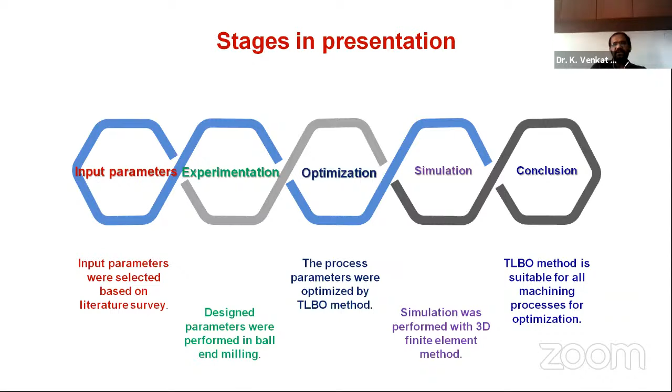Next is optimization of process parameters to minimize power consumption using the TLBO method - how it was selected, we are going to see now. Next is simulation, using many simulation softwares like ANSYS, DEFORM 2D, 3D, AdvantEdge, etc. Finally, we go to the conclusion.

Now if we see the ball end mill cutter, I've shown you the shape of it. It's mainly used to meet demand in production of micro-feature-based miniaturized parts like biomedical devices, parts used in automotive industries, aerospace industry, and dies for forging and casting. These ball end mill cutters have the additional advantage that complex shapes with good surface quality can be made.

But there are some fundamental challenges with the ball end mill cutter with respect to surface roughness, tool life, cutting forces, and overall efficiency, which includes power consumption. In high speed ball milling, cutting force is one of the important machining characteristics that has great influence on other characteristics like tool vibration. Tool vibration results in tool failure and surface roughness issues. Finally, cutting forces have major significance on power consumption.

So the aim of this study - this work, the presentation I am presenting here, was already published in a measurement journal by me in 2019. The focus was on power consumption.

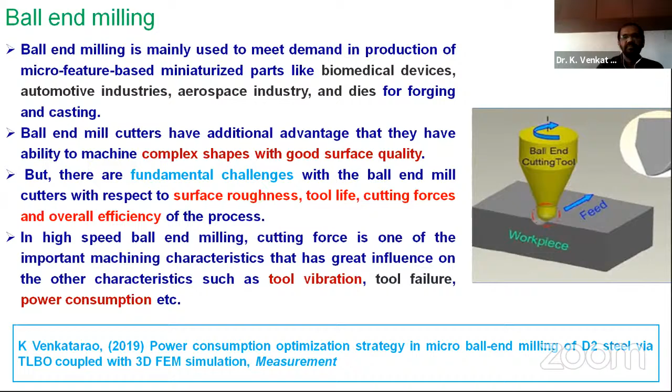Next, what are the different optimization techniques used in manufacturing as well as mechanical engineering? Taguchi method, response surface methodology, gray relation analysis, particle swarm optimization, genetic algorithm, simulated annealing, ant colony algorithm. In addition to these 7, we commonly use other methods - graph theory and matrix approach, along with utility concept, and finally the teaching learning based optimization technique.

Now if we see the first one, the Taguchi method - it is a single response optimization technique. A simple example: there is one turning process. In the turning process, we have 3 input parameters - cutting speed, feed, and depth of cut.

The responses, the machining characteristics or output characteristics, let us assume are surface roughness and cutting force. We want to reduce both surface roughness and cutting force. In the Taguchi method, you cannot optimize the process parameters combined for these two - that is called multi-response optimization, and it is not possible. So we can optimize the process parameters for surface roughness and for cutting force separately and individually.

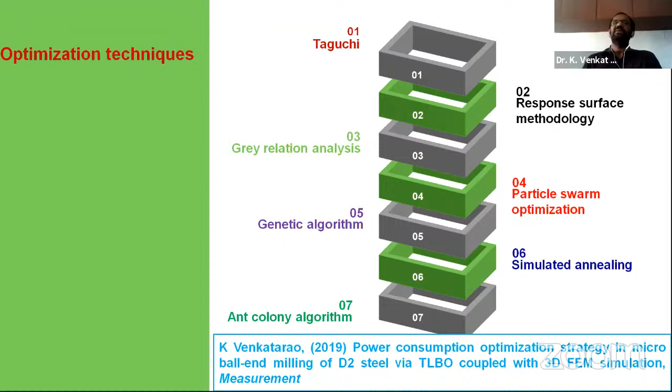From the optimization techniques, as per our requirement we selected TLBO, which I will explain. Next, for simulation, we selected FEM-based simulation. For this, we used Third Wave AdvantEdge, an advantageous software for machining simulation, which is easy to use. That's why I selected these.

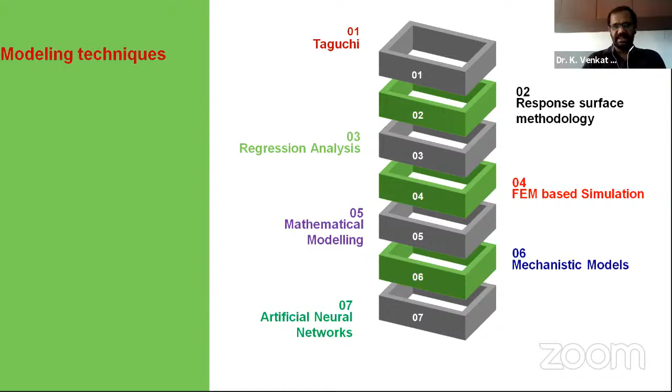Now this is Teaching Learning Based Optimization. In some applications, this TLBO method is able to handle complexities in optimization. This I already explained. So how does TLBO work? First, knowledge is transferred from teachers to students - that is called the teacher phase. After that, knowledge is transferred from good students to poor students - that is called the learner phase or student phase. This way optimization takes place.

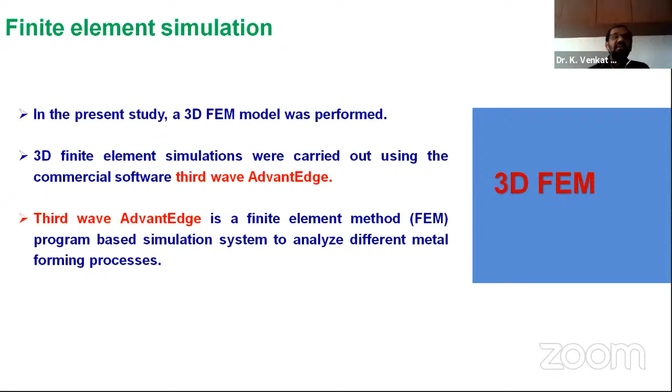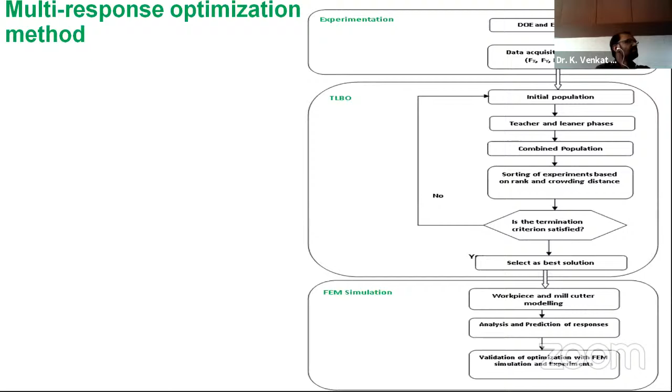Next is TLBO - initial population is defined. After that we have teacher and learner phases. Next is combined population, from which we select the best one. Finally we have the simulation. Using that simulation, the output characteristics are estimated and the optimization is validated.

But the problem is that in a CNC machine there are many subsystems, not only the machining process. Generally during machining, cutting forces are developed and some power is consumed for that. Also, if you see the table moving in X and Y directions, that additionally consumes power not directly related to machining. You can include that power because while machining we are moving the table, so we include the power consumption for table movement in the cutting process.

But if you see the coolant supply, some power consumption is required to supply the coolant. To change tools, some power is consumed. To operate the controls, some system is required that consumes power. Other than machining, there are other subsystems like coolant supply, control systems, and tool change - all of these also consume power. These three power consumption areas also get included if you measure power directly. So I don't want to include those elements. That is why I estimated the power consumption using the cutting forces instead.

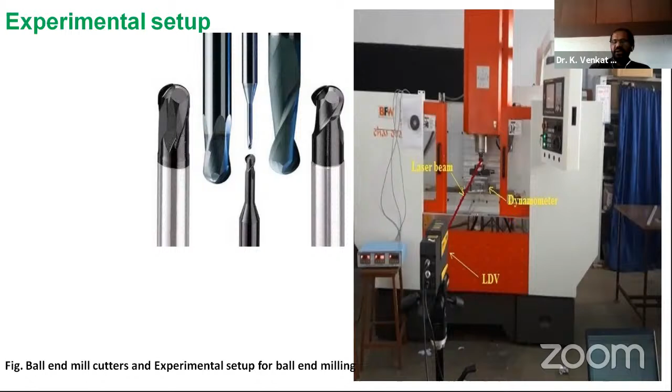Cost of that one is around 18.5 lakhs, which was purchased under the DST project, imported from Germany. So where you have the dynamometer, using the dynamometer forces are measured in X and Y direction. Next, let us see the experimental procedure followed in that process.

Experiments are conducted using the mill cutter, which is a 2-fluted carbide ball end mill cutter. Each experiment started with a new mill cutter. The LDV, which is a Polytec PDV-100 type laser Doppler vibrometer, is used to measure amplitude of tool vibration during the machining process. Next is the Kistler 9257B type dynamometer used to measure the cutting forces during the machining process.

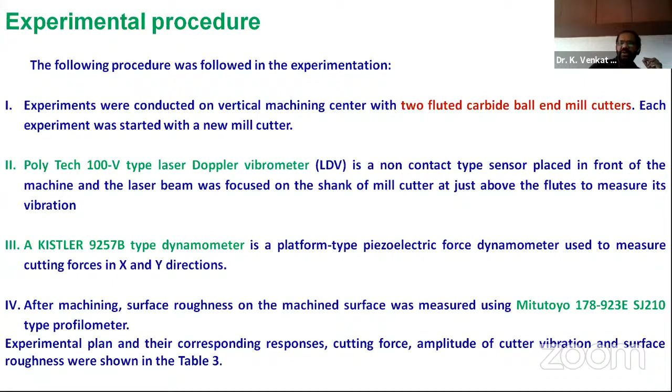After machining, the tool and the workpiece were removed. Then the surface roughness on the machined surface was measured using the Mitutoyo 178-923E SJ210 type profilometer. After that, all the experimental results which are collected and estimated are placed in the table. FX, FY,

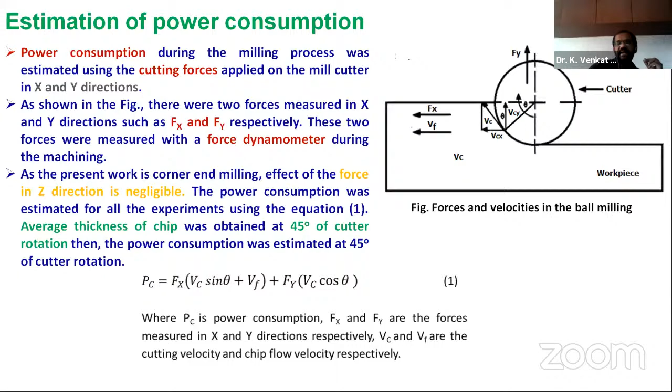Using this equation 1 at 45 degrees of cutter rotation, where you have the average thickness of the chip, that's why we estimated the power consumption, these values were taken here. Now we are going to the optimization process.

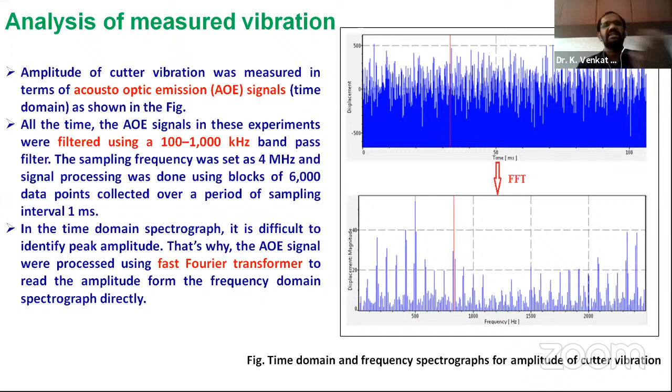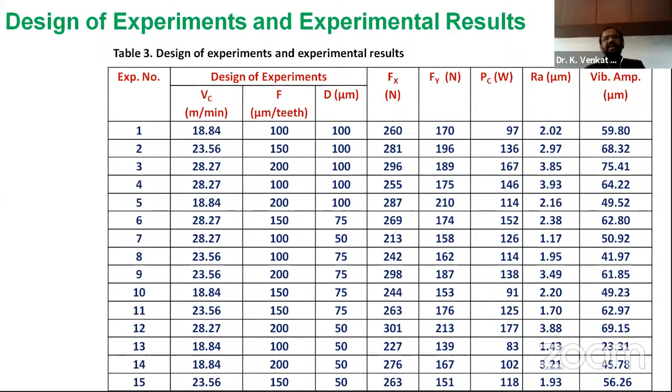These constraints, Y and RA - Y is nothing but amplitude of cutter vibration, RA is surface roughness - should not exceed those particular values as per ISO standards. So how were these equations obtained? This table, table 3, this data you simply place in Minitab 17, 16, 18, 19, whatever the version. You put this table there, you select the inputs and outputs, and if you generate, you will get these equations in terms of the inputs.

For PC, RA, Y, we got the mathematical equations in terms of VC (cutting speed), feed, and depth of cut. Finally, we put the constraints on Y and RA. During optimization, the cutting speed should not cross 15, should be within the limits 15 and 30. It should not be less than 15, should not be more than 30. Similarly, feed should not be less than 100 micrometers per tooth and should not be more than 300 micrometers per tooth. Depth of cut also should not be less than 15 micrometers and should not be more than 200 micrometers. These are the constraints. What are these parameter bounds?

When we allow interaction between the students, knowledge is transferred from one student to another. The general condition is that the intelligent student, the fast learner, cannot concentrate for 24 hours of time. He will set some time. So for this particular student, to whom I am the mentor, I have to give minimum 2 hours or minimum 1 hour of coaching, and it should not cross 3 hours. So I can spend between 1 to 3 hours on him. The mentor, that fast learner, cannot spend more than 3 hours, and at the same time the coaching should not be less than 1 hour. Like that, the parameter bounds were set.

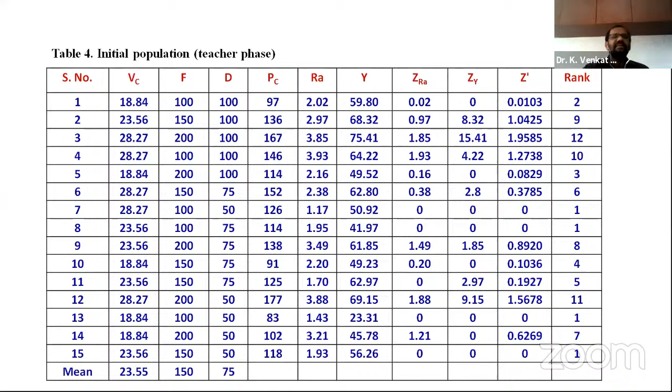That one method he introduced here: we have to identify and calculate the difference underscore mean for the cutting speed, feed, and depth of cut. For the 3 inputs, you have to estimate the difference underscore mean. The formula is there, you don't need to worry about that, all the formulas are available: R into X minus X bar.

What is R? R is the random number. You can select any value between 0 to 1. So in this study we selected random numbers: 0.89 for the cutting speed, 0.75 for the feed, 0.41 for the depth of cut. Like that, these random numbers were selected for the 3 inputs. So R is the random number, X is the input value as we know, and X bar, already I told you, is the mean value.

How to estimate difference_mean? I will explain with an example. See this one, difference_mean for the cutting speed, 0.89 we already selected here. You can take any value, even in reverse order like 0.41, it doesn't matter. Whatever value you wish, you take that. So here I have taken 0.89 into X minus X bar.

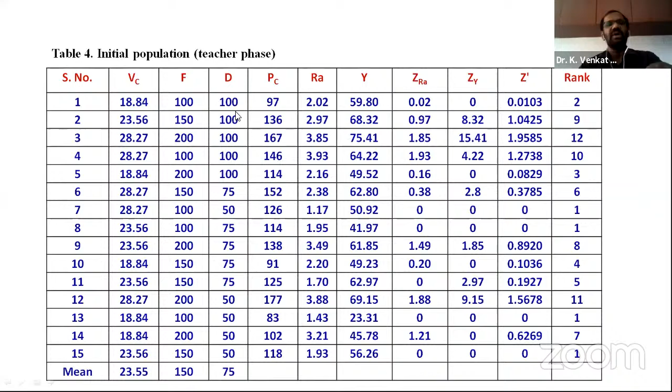18.84 plus minus 4.19, you will get 14.65. Where did you get this 18.84? See this one, here we have the difference_mean. Similarly for the hundreds also, difference_mean values were added. So if you add this for VC, that is cutting speed, you have 14.65.

New feed, you got 62. New depth of cut, you have 110.25. So far it is good. A small thing I will tell you: cutting speed is 14.65.

Now for the feed, if we see 100 plus minus 37.5, you will get 62. It is less than the parameter bound. That is why we have to take 100 here, and that we have taken.

Now if you see here D1, if we add the difference_mean to the 100, we get 110.25. If you see here, that is within the range. That is why it is not required to change the values which were taken.

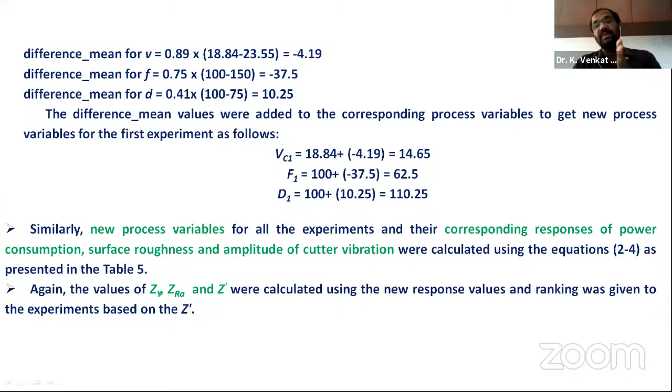So these two values are not the same, 15 and 100 are not the same. Actual values are 14 and 62.5. As they crossed the minimum limits, as per our requirement minimum values we should not take, we should take the minimum values, not less than that. That's why we have taken 15 and 100, and put A at the bottom. The values have crossed the limit, hence the bound values were taken.

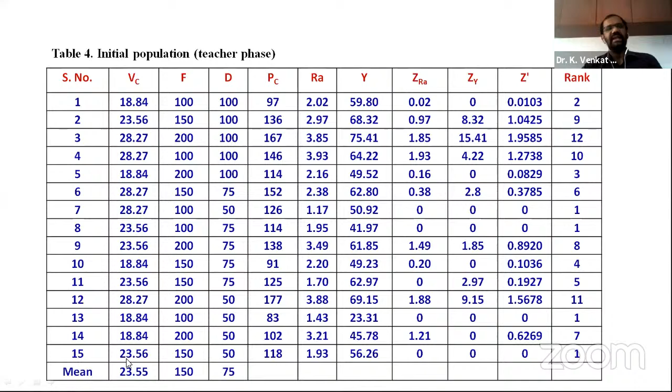Similarly, these difference_mean values are added to all the experiments, and we get the new process parameters in table 5. You see for experiments 2 to 15, all are new process parameters. If they cross the limits, we put A, indicating that they crossed the limit. So here we have the new input parameters.

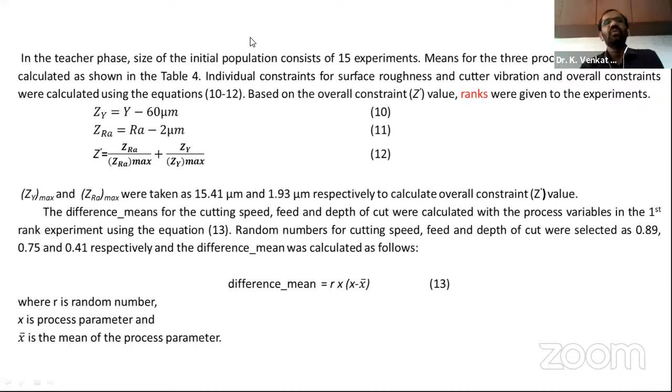For the new input parameters, you have to identify the power consumption and surface roughness, Y values, using equations 2, 3, 4. So new process parameters we got here, and using that, they substituted in equations 2, 3, 4, and we get the power consumption, surface roughness, and the amplitude of cutter vibration.

That is where you got the new inputs and the corresponding outputs. ZRA, ZY, Z dash, we know already, we explained. RA minus 2, Y minus 60, negative values are taken as 0, positive value taken as is. This value Z dash, the overall constraint, is also estimated based on Z dash.

Ranks were given, total up to 7, where in the next step table 4 and 5 are combined. This is called combined population. Before new inputs and after new inputs, these two tables have been combined here. From this table, the experiments having the first rank are identified and kept in table 7. See this one, total 15 experiments were taken.

So as it is starting, we have 15 experiments. That's why we have taken 15 experiments. Among these 15 experiments, 13 are first rank.

The constraints were satisfied: power consumption, RA is satisfied at less than 2, and Y is less than 60 in the 13 experiments. In experiments 14 and 15, one of Y is satisfied but RA is not satisfied. No problem.

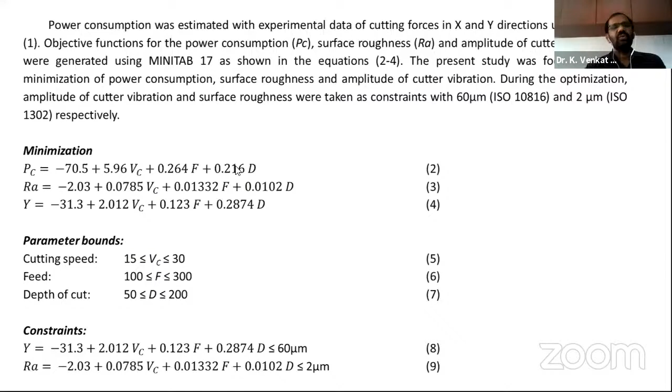For the new inputs, corresponding PCRA and Y values are identified using equations 2, 3, and 4. The new input parameters are substituted, and you get the results - you need not take a calculator and do all the calculations.

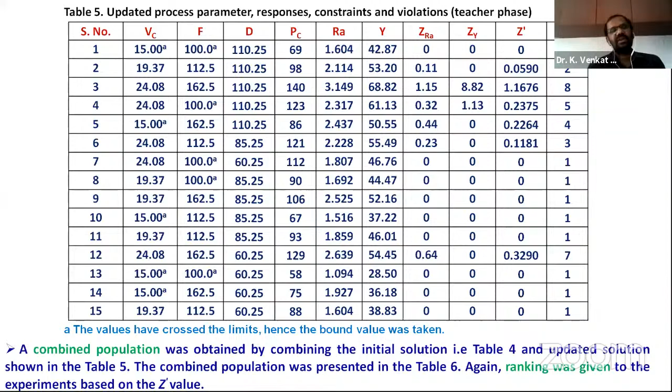We have Excel sheets - you develop the Excel sheets. In those Excel sheets, once you develop the formula, if you click and go column-wise, you will get the values. No problem with that.

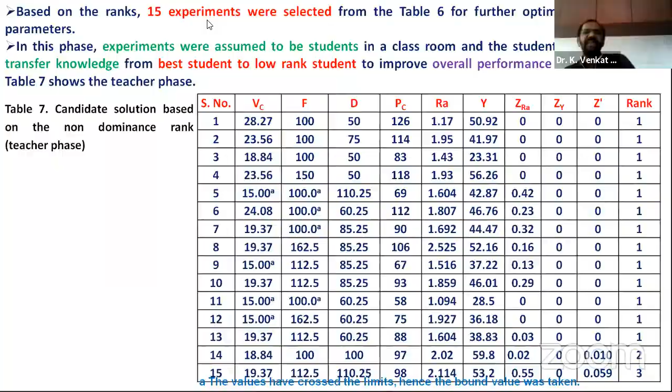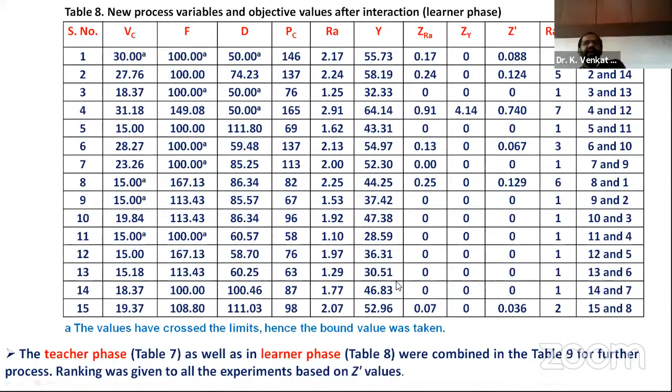Similarly ZRA, ZY, Z dash values are given, rank 1 accordingly, and ranks are given again - this is table 7 before interaction, and after interaction you have table 8.

You can see here, among 30 experiments, we want to select the first rank. We have a number of first rank experiments. Among these first rank experiments, they satisfy two criteria: surface roughness less than 2 µm, and vibration less than 60 µm. Among all these, whichever has less power consumption will be selected.

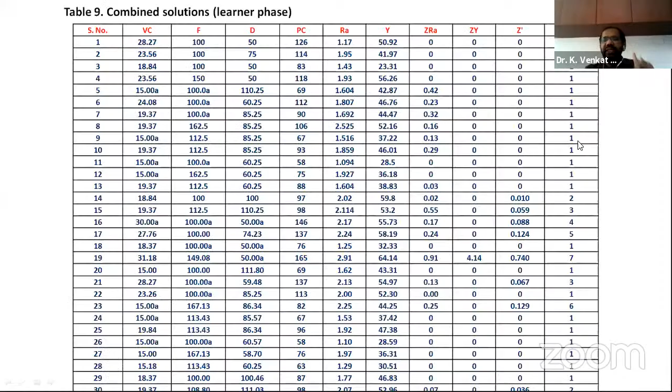So first, all the PC values. See this one, 1, 2, 3, 4, 5, 6... In this one, 21 experiments got rank 1. From 30, you have 21 experiments. Count them: 1 through 20, 21 experiments having rank 1.

See, these experiments are arranged as per PC, in ascending order. All these things are arranged in ascending order, so the highest values are given infinity value, and it is cut here. Now you can see, for the power consumption, experiment serial number 11, 26 have the least values, and experiment 1 has the highest value. So least values and highest values are given infinity.

Similarly, for RA also, all the RA values are arranged in ascending order, giving least value and highest value infinity. Y is also arranged in ascending order, assign the least value with infinity, assign the highest value with infinity as the crowding distance. How to estimate the crowding distance for the remaining things? You see here, you have the formula.

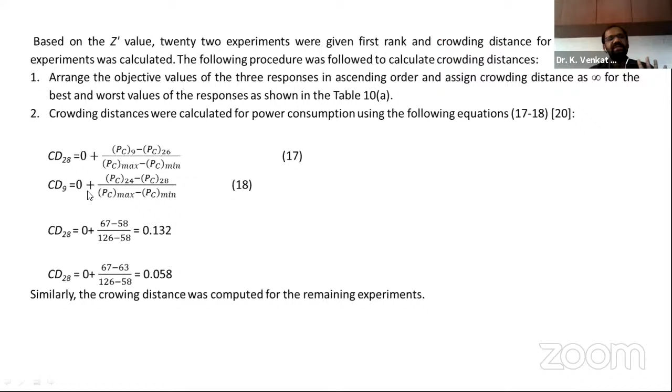Don't confuse, I will explain in detail. Estimation of the crowding distance: you have to estimate the maximum value and minimum value of PC. 58 is the minimum value, 126 is the maximum value.

To estimate the crowding distance for experiment serial number 28, see this one, 67 minus 58. I want to estimate the crowding distance for 63. For this one, from the previous slide: PC 9 minus PC 26, divided by PC maximum minus PC minimum. See, now in the next slide.

See this one, for this: PC 9 minus PC 26, before and after values. PC 9 is the before value, more than 63, and the next value less than 63 is 58. So that's why it's 67 minus 58, divided by 126 minus 58, that is PC maximum minus PC minimum.

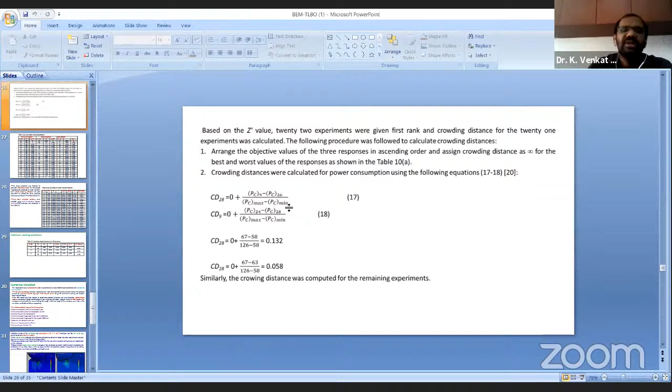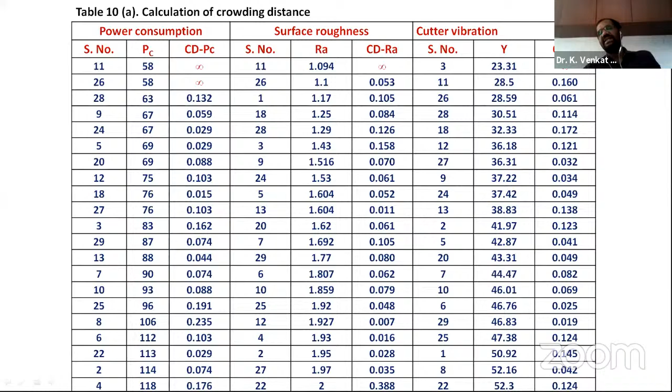So like that, we estimated the crowding distance for all the experiments, for all the serial numbers, and finally the overall crowding distance was estimated and added here. Based on the central crowding distance sorting technique, we found 3 best solutions, 3 candidate solutions.

So at these PC values, the RA values condition is satisfied, less than 2 µm, Y values also less than 60 nm, and like that these three are estimated as the optimum working conditions. The TLBO suggested 3 optimum working conditions.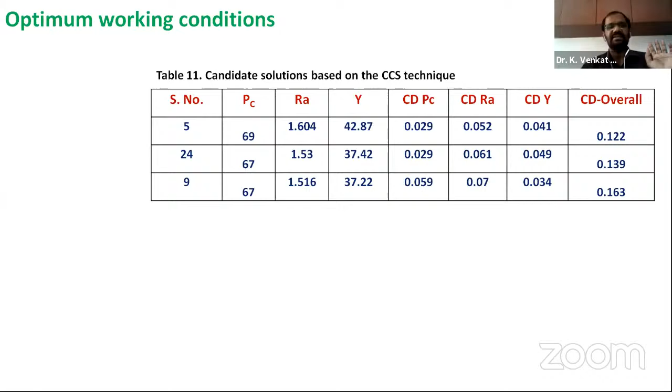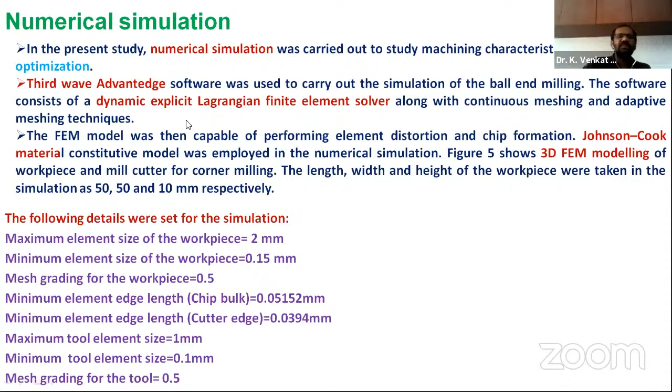Now we have to validate this. In this process, just 5 minutes and I will close it. I don't take much time here. We used the Third Wave AdvantEdge software. In other software like ANSYS, we have to design the workpiece and tool, specifications, workpiece, all those things are to be defined.

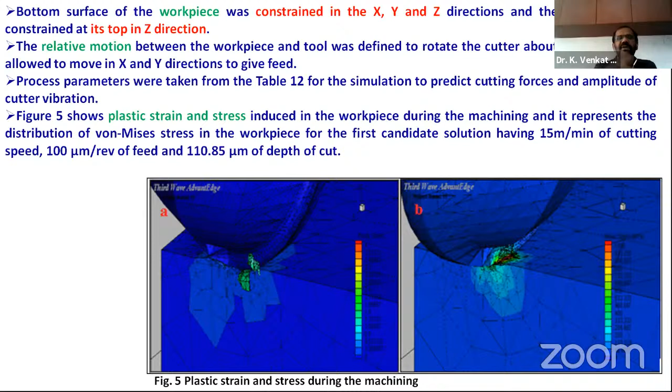It's not like ready-made tools are there. Simply you have to give the values: what is the diameter, what is the length of shaft, what is the radius of ball, and what is the helix angle, rake angle. Simply if you type that in, it will give the ready-made tool, and if you carry out the machining process, finally we can predict the cutting force in X, Y.

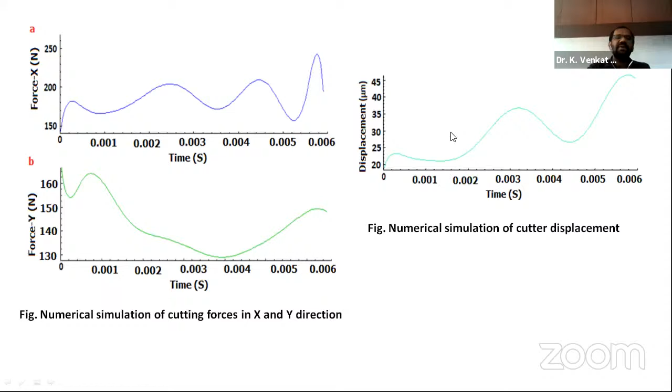I don't take much time here, as the time has crossed already, 12:30. The amplitude of cutter vibration is also measured, predicted using the software, and experimentally too, at this working condition. 5, 24, 9 are the optimum working conditions. At these optimum working conditions, experiments are also conducted.

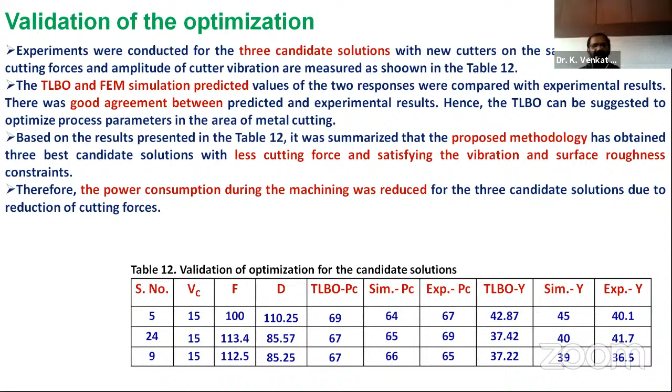If you want, you can take 3 as optimum. So especially if you want to concentrate on power consumption as minimum, experiment 9, with cutting speed of 15, feed of 112.5, and 85.25 as depth of cut, you can take as optimum, and the criteria are also satisfied. So these are the conclusions already concluded. Thank you, any doubt you can please ask me.